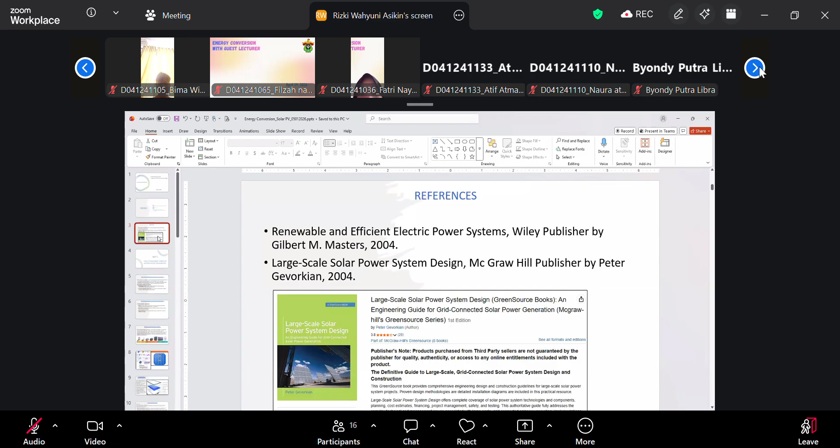The material today, I use several sources, there are two books I've been using a lot. This is the first one, from Renewable and Efficient Electric Power Systems, published by Wiley. That's mostly the fundamentals of the electrical theory.

And then the second one, which is where I found the picture, is Large Scale Solar Power System Design. This gives you the idea on how to build, how to design, and the kind of process behind when you're going to have a project of large scale utility connected system.

So when you finally graduate and go into the job market, at least you'll have the idea on how to build a solar system, because in Indonesia I think there are still a lot of opportunities there for solar engineers, I would say.

So this is just kind of like the idea, or what my references and Google or AI suggest. Okay, so part one, the material itself. I'm not gonna go too deep here.

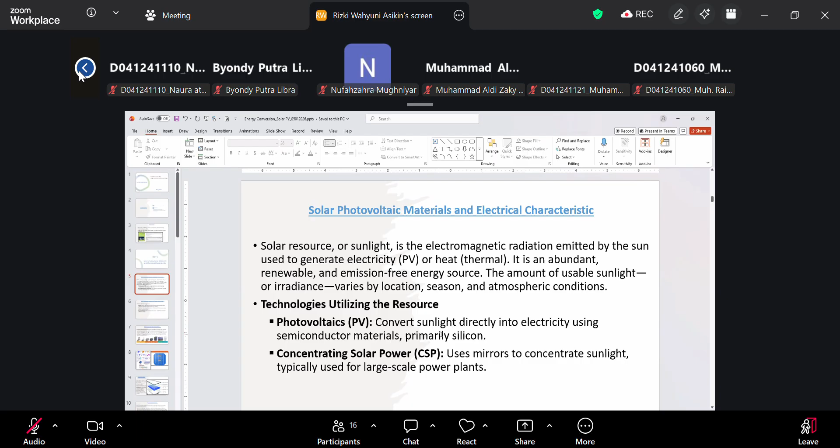And then the next one is technologies utilizing the resource. There are two most common ones: photovoltaics, which converts sunlight directly into electricity using semiconductor materials, primarily silicon. And then the other one is concentrating solar power, or CSP, which uses mirrors to concentrate sunlight, typically used for large scale power plants.

I see this a lot, at least in the US. CSP I saw a lot in Nevada, near Las Vegas, which is one of the biggest cities in Nevada. That's where I saw a lot of this CSP, like if you pass by the highway, because it's very dry over there, very flat, dry, sandy, desert.

Desert, no, desert, not dessert. Dessert is what you eat after a meal. It's a desert environment, so it's very hot there, very dry, you barely get rainfall over there.

So they have a very big of this CSP, solar thermal power plants over there. But photovoltaics itself, I see a lot of in Arizona, and as well as in New Mexico. It's closer, kind of similar, but I think more in Nevada and less in Arizona, though they're mostly photovoltaics. You'd see a lot in New Mexico, on the borderline between America and Mexico. That's where you see a lot of this solar PV, the photovoltaics.

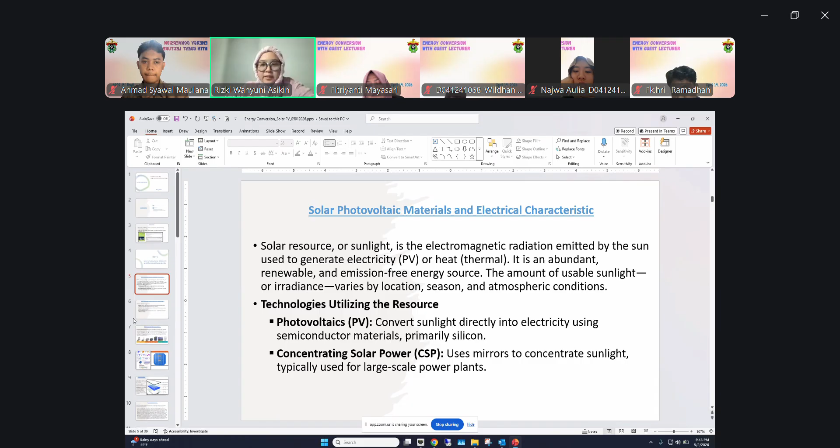So that's that one, and the common material for the solar PV is silicon. When I was doing my internship, we did mostly projects or research at that time using silicon based materials. There was one project about thin film at that time, so it's just a different material. I'll explain more later when we go to manufacturing.

The silicon usually comes from an ingot, and then it's this size. But the thin film is usually bigger, like a plastic paper, a big paper, and that's the thin film. At that time during my internship, there was research going on for MIT, Massachusetts Institute of Technology. They had research on how to use thin film on a car, using the rooftop of a car with thin film to produce electricity for the car.

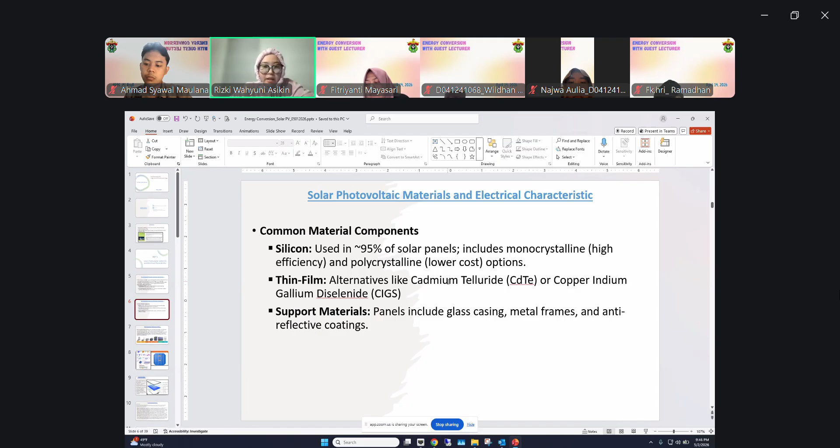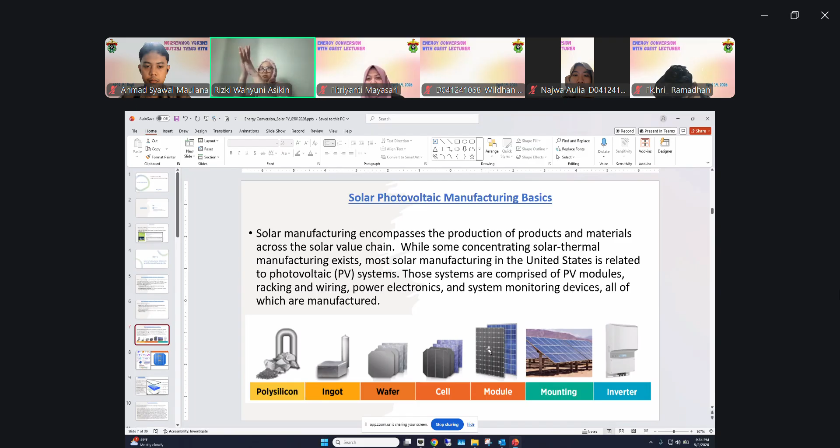And then when it comes out, it's essentially already a complete module. It becomes like this, but it has to be put inside the oven to make them glued together. So that's what this one is right now, they are already becoming the module. This has become a module, and then you combine them, put the supporting, and now it becomes the system, right?

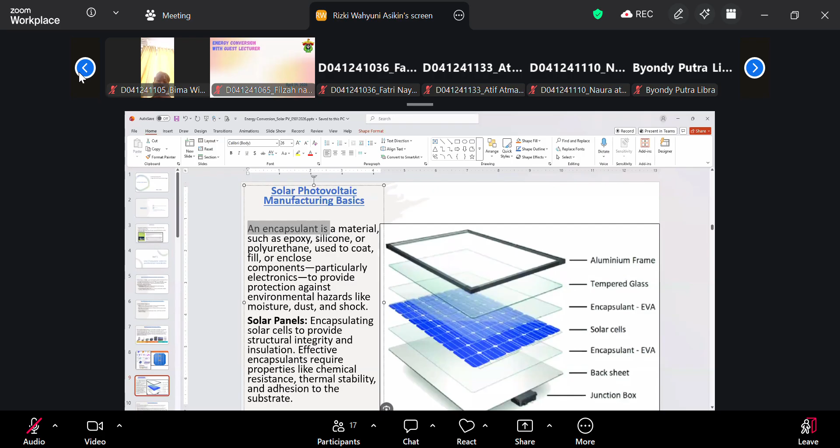And then enclose components, particularly electronics, to provide protection against environmental hazards like moisture, dust, and shock.

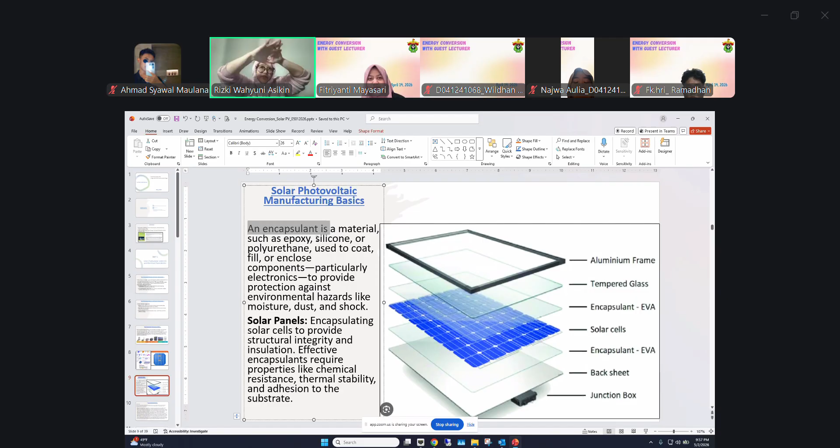And one thing, I remember watching the drama Shine on Me, which talks about a solar company, and one time it was snowing, and snow got onto the surface, and they were all cleaning it. So especially if it's snowing, if you leave it, it's gonna get hard, and when it's hard it stays, and it can break the glass pretty much.

So it depends on where you have your solar PV project. All of these are maintenance. If it rains a lot, moisture can get in, how do you handle that? If it's in the desert, with a lot of sand and dust, how do you maintain and clean it? So things like that.

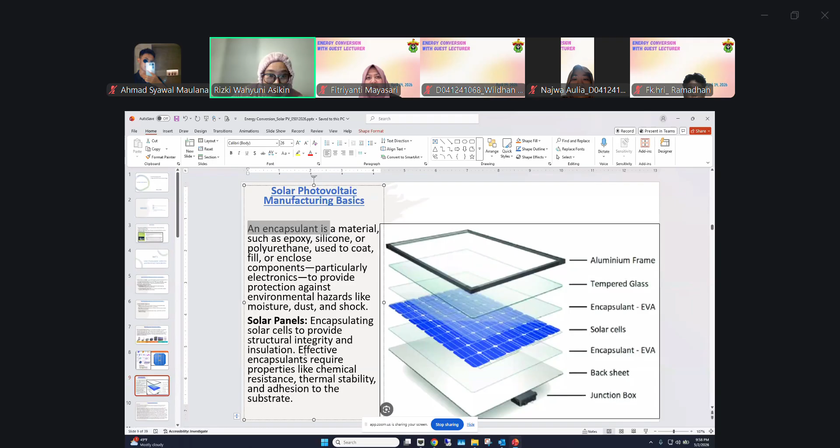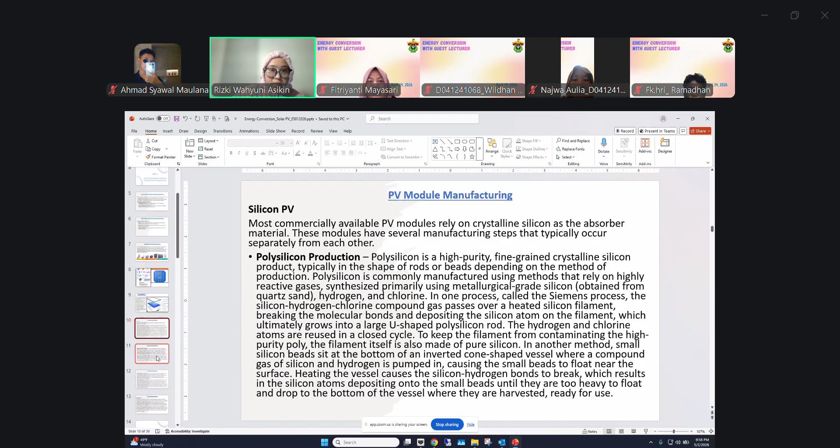What else? This one, effective. Okay, that's fine. And this you can read, I leave it here. Ingot and wafer, the cell fabrication, we talked about that, the module assembly, we talked about that somehow. Thin film, we talked about it a little bit. It's just different material, and I think the application is also different-ish.

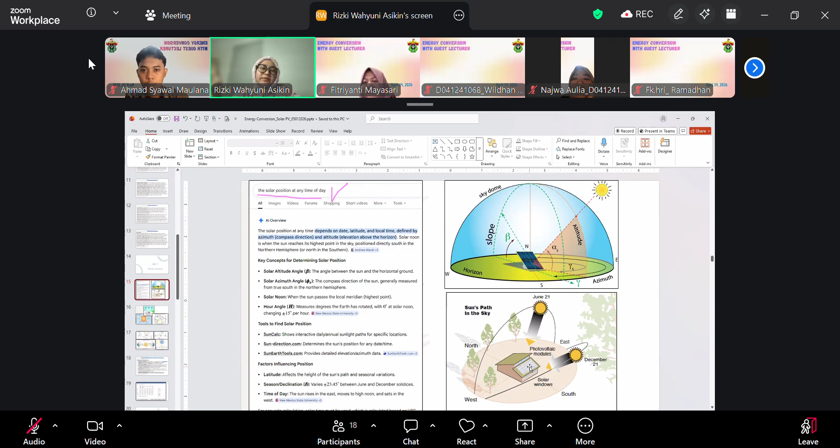But if you live in the US like me, it's totally different. It changes depending on the season. So that's the relation of all of those: where do you live? If I live in Indonesia versus Pennsylvania, if I have solar PV on my rooftop, what would be the different production? Where you are on Earth determines your solar production.

But how to calculate that, how to correlate all of those, this is what the solar resource is all about, right? There are so many terms and formulas here, but I'm not gonna go deep. If you take your master's or PhD, you can go into the details of all those formulas. This is just an introduction, right?

So if this is your panel and this is the sun, you have to keep in mind that the sunlight that touches the panel perpendicularly, right? Yang tegak lurus, sinar yang tegak lurus, that's the strongest, that's the highest electricity produced by the panel itself. So how you design it depends on your location on earth.

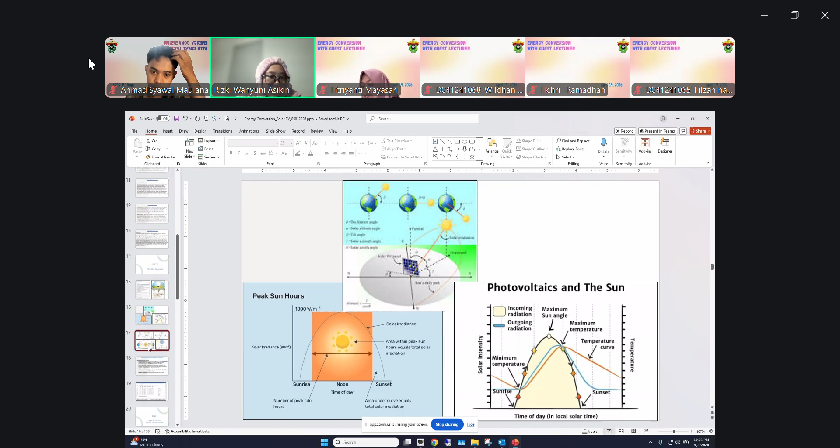And then as the sun is perpendicular above your head, your panel gets to the max, that's where your energy production is the highest. As it gets to the afternoon, it gets lower and lower, to the point at sunset you get zero kilowatt hours produced. During the night you don't get anything, right? So that's this, which is similar to this one.

All right, I'd like to explain this one more. So if you are in Indonesia, which is in the equatorial region, right? The rule of thumb, right?

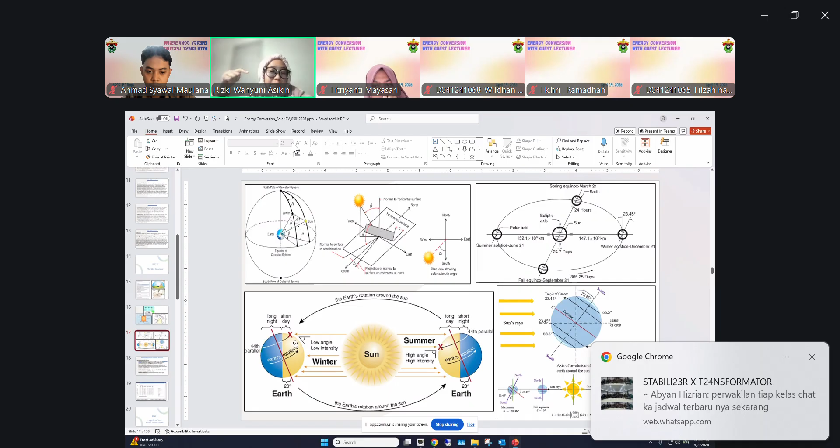Nah, ini makanya pada saat winter itu in relation dengan solar PV production itu kita bisa expect bahwa during winter time your solar PV production will be less. So that's what it is, right? And then if you have to use your backup, for example, like storage, then go for it, right? So that's during the winter.

And how about during the summer? So this is winter, and then toward the summer, this is where spring is. So in between winter and summer is spring, musim semi. Kayak sekarang ini musim semi. And this is fall or autumn. It's the same. Amerika menyebutnya fall season, tapi Europe kayaknya pakai autumn. But it's the same thing. So in spring and autumn, the night and daytime are similar, like 12 hours each. But winter and summer is totally different.

During summer, when it's tilted like this, at the northern hemisphere, that's where it's very hot and it's a very long day.

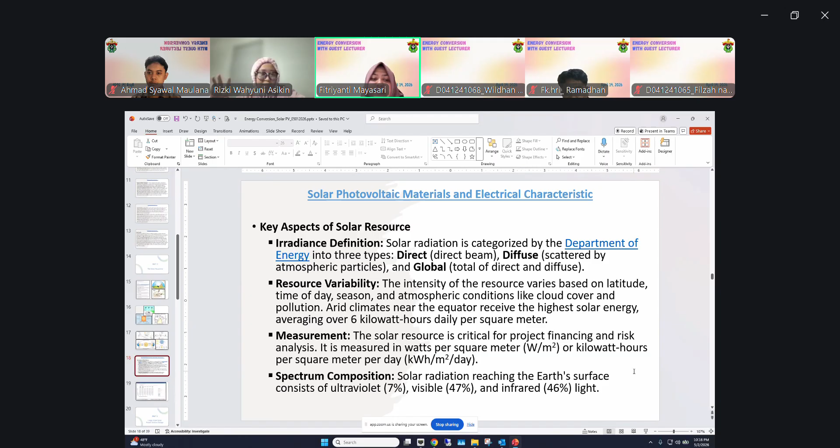Okay, what else? Next. Maya, until what time? What time is my limit here? 100 minutes, 1 hour, so 40 minutes. So 9:15, 10:15 is 60, and then another 40 minutes? Yeah. Okay, cool. I just want to make sure. All right, so we're going to 10:15 plus 40. It's almost 11. Cool. Hopefully nobody's falling asleep here. All right, so next.

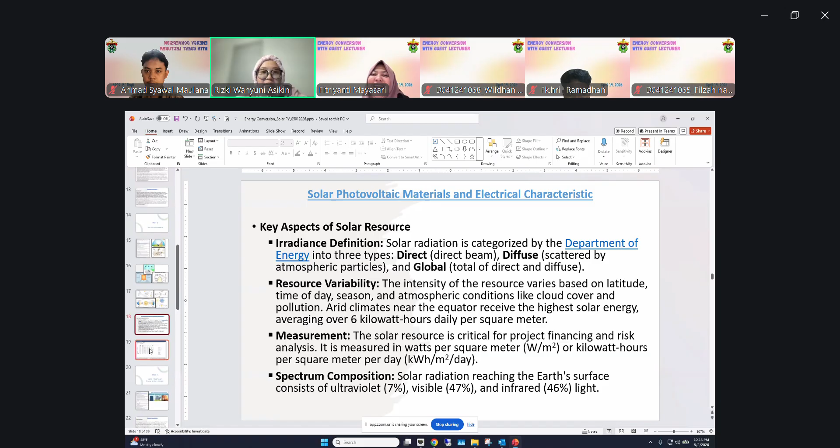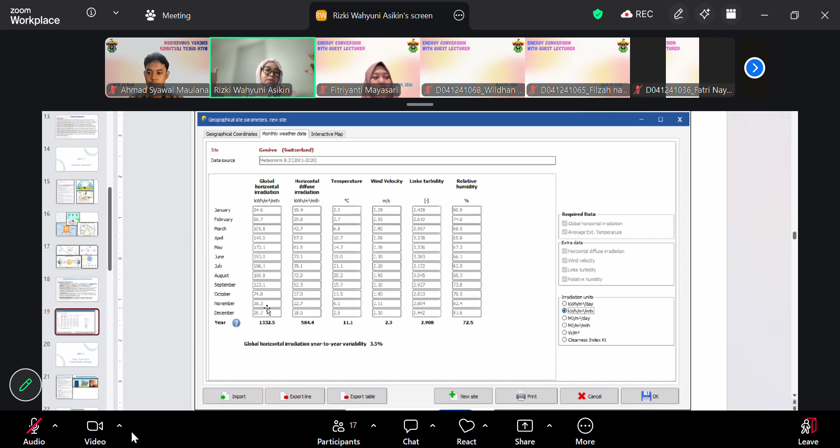August gets less, but still more. Then September is when the fall or autumn season starts, and it gets less and less. We get to November and December, the winter, and it's much less than the summer or the fall. That's just to give you the idea, in the northern hemisphere. In Australia, for example, it will be the opposite. January is the lowest here, but in Australia it will be much, much higher.

So it's just to give you the idea that it does have the impact, all this solar rotation. And then solar... what is it called after rotation? When rotation is like every day, but then throughout the year, what is it called? Revolution? Is that what it's called? I don't know. I thought it's revolution. Maybe. If anyone knows, please remind us. It's high school, it's been a long time ago.

All right, anyway, so that's the end of part 2. I'm going to pause here before we get to the large scale solar power system design. Any questions, guys?

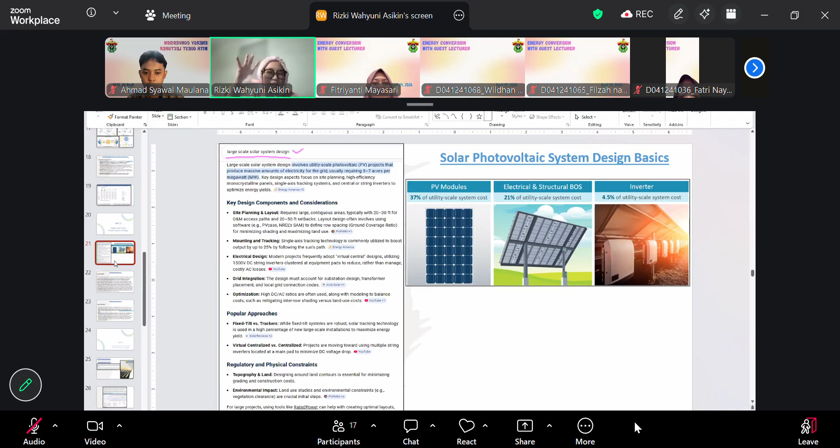All right, I think that's it, let's just move on. It's 10:23, so we have like 20 minutes. All right, next, this is my most favorite part. You can tell me all this theory, but I'm very hands-on. If it's theory, whatever. But if it's the practical part, that's easier for me to understand when I get to the hands-on experience or practical knowledge. That's what I like the most, and that's why I am here now.

So anyway, this is the design. When you're designing the system, what are the considerations? Okay, let's see here. All right, this I took from Google. So large scale solar system design. Let me just read this real quick and then we'll get to the simulation. Large scale solar system design involves utility scale photovoltaic.

Utility, like PLN. So utility scale photovoltaic PV projects that produce massive amounts of electricity for the grid, usually requiring 5 to 7 acres per megawatt. In the US they don't use the SI international standard. Acre in our language is hektar. International standard uses meter squared. So in the US they usually say acres per megawatt, 5 to 7 hektar per megawatt. So to produce 1 megawatt, you need 5 to 7 hektar of land, depending on the location.

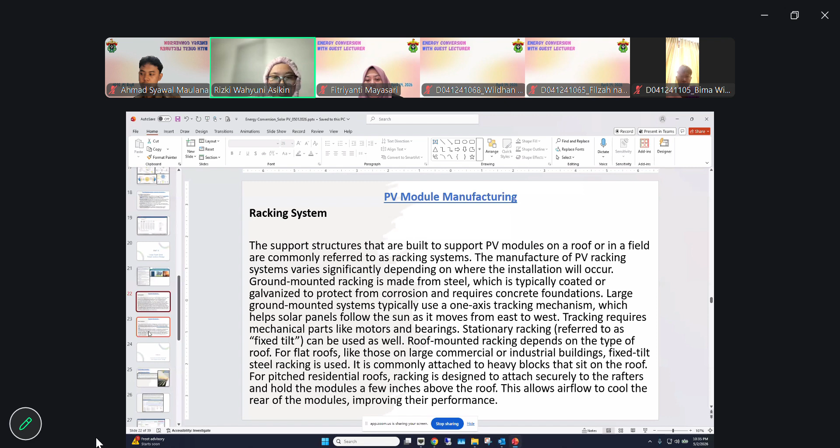So that, and then topography and land, and then environmental impact as well, right? That's just... where were we? Okay, racking system, I'll explain more. Power electronics, inverters. And then let's go to the simulation of grid connected system.

I briefly mentioned about this one. So this is what I used a long time ago. When I was at my school, during my study, I was using the PVSyst software simulation. So this is just one out of several. It mentions here, what is that software? Oh, for example, PVcase, that's another software. There's NREL, National Renewable Energy Laboratory in the U.S., very famous in the U.S. It's called SAM, I forget what SAM means, but it's one of the software. And then PVSyst is a comprehensive software.